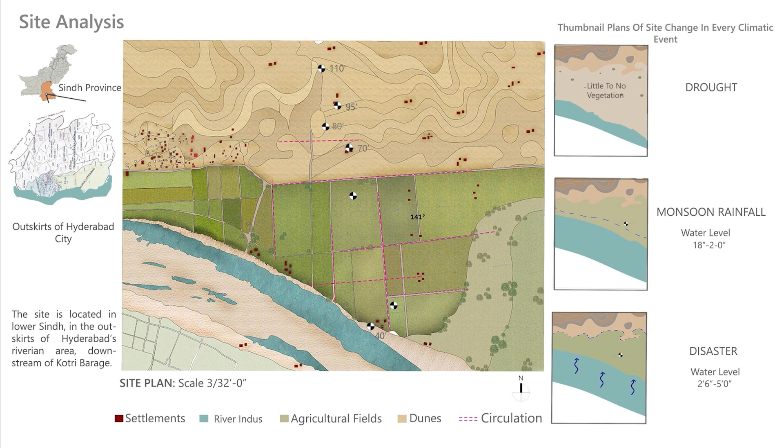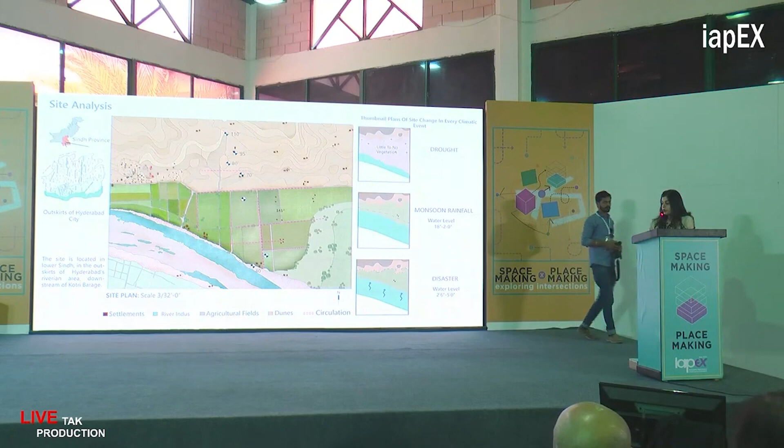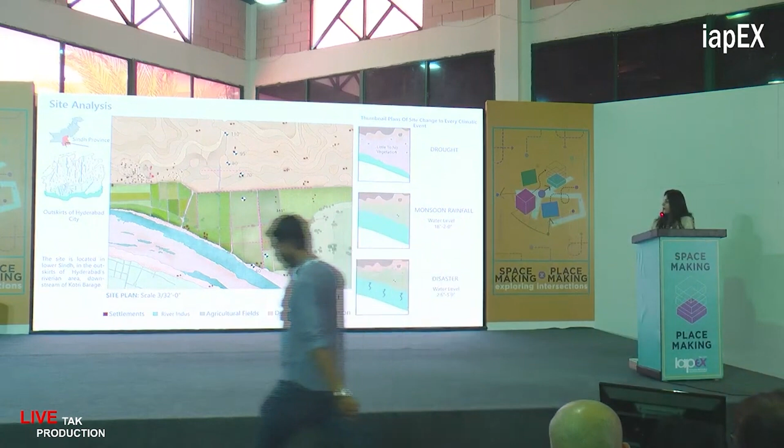The thumbnail plans to the right show that the site is in constant flux because of the flow of the water and the climatic discrepancies that keep happening. The site keeps changing.

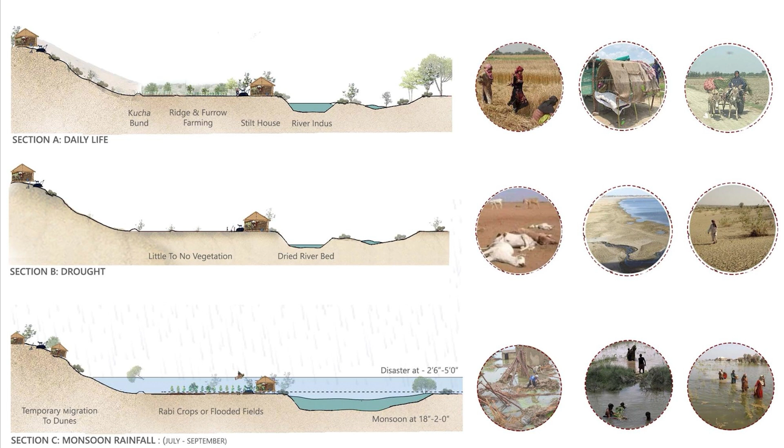The site section, on the first section, shows the site in daily life. During daily life, ridge and furrow farming practices are happening. The communities live on stilt homes made out of bamboo. Their mode of travel is on the Kucha bunds that happens on these donkey carts, and most of their daylight working hours are spent working on the fields as farmers.

The second section shows the site during a drought or a heat wave where there is little to no vegetation, the riverbed has dried, and cattle health is disrupted. The land is also unfit for cultivation.

Section C shows the site during monsoon rainfall or even in the advent of a disaster. During the summer monsoon months, July to September, the rabi crops can be flooded in an extreme condition, and the communities have a temporary migration towards the dunes. The images to the right show how the landscape changes during each weather pattern.

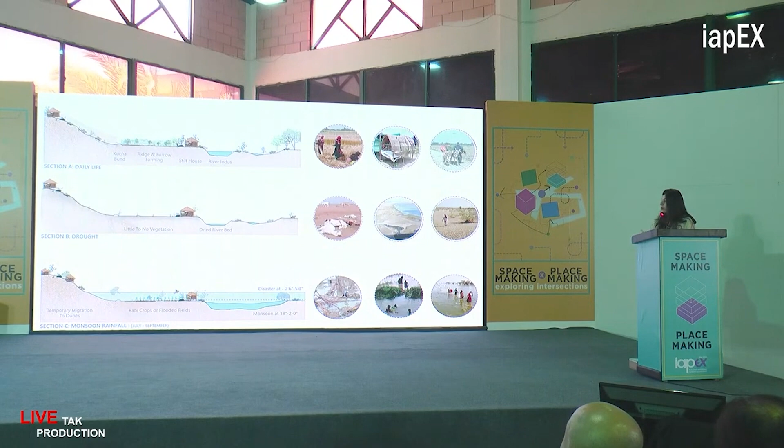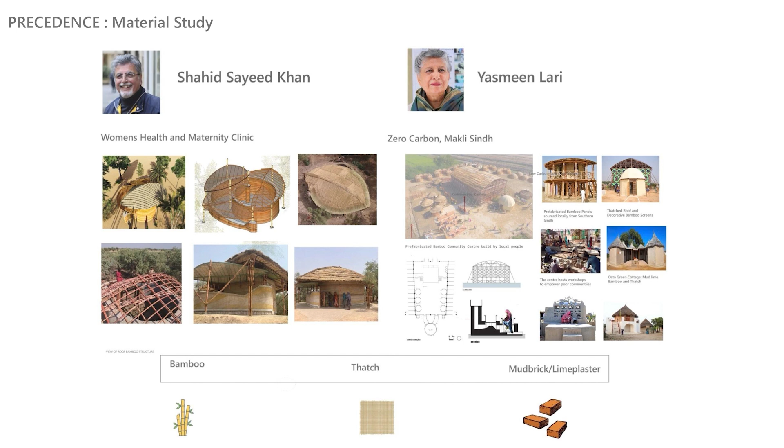For the building and construction of this project, I looked at the work of architect Shahid Sayeed Khan and Yasmeen Lari because they have proposed long-term solutions working with these communities. It was concluded that bamboo, thatch, and mud brick coated with lime plaster was the best material for use.

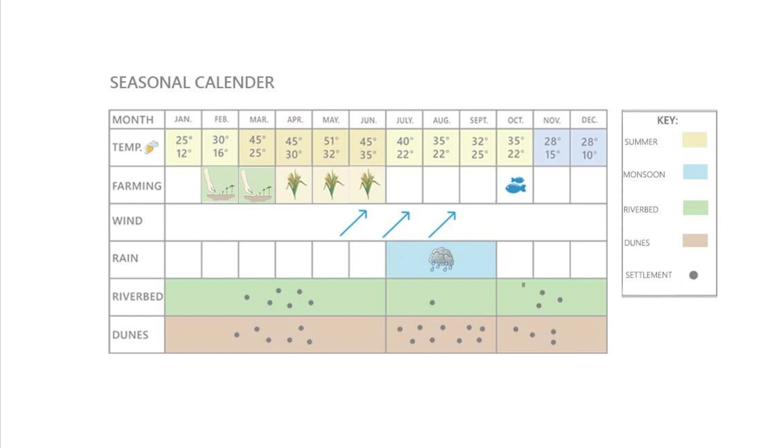To understand the users of my site and their makeshift way of life, I made a seasonal calendar. The first row records the temperature, the second records the farming, so the sowing and the harvesting period, the wind direction at my site, rainfall that happens during July and September, and then the last two rows are the population densities on the riverbed and the dunes.

It is concluded that the communities have a nomadic or makeshift way of life where they keep moving from place to place to find the best environment for their crop and their livestock. The last two rows depict that the dunes are always populated all year round because they are higher elevated ground. The riverbed is also populated because they work near the fields and they need to collect water, but during the monsoon months, the riverbed is not very populated.

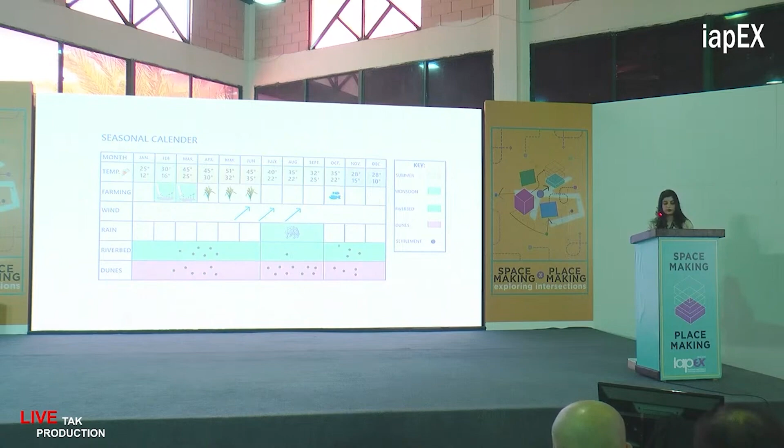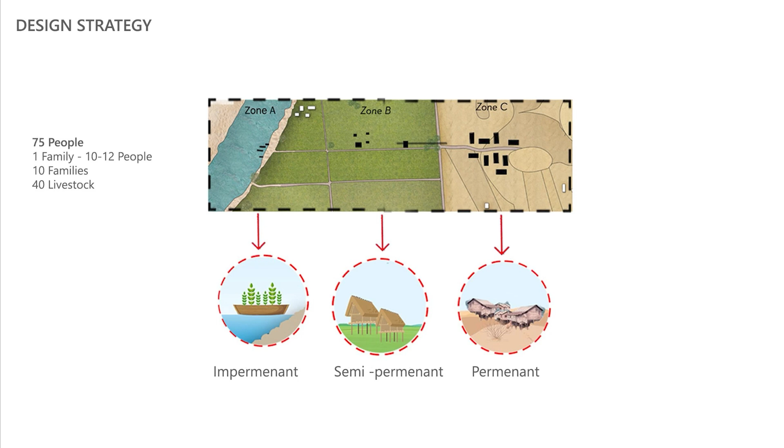After observing these movement patterns and the nomadic lifestyle of my users, the design strategy was that I scattered my architectural masses on three zones, Zone A, B, and C. Zone A has all the impermanent architecture, Zone B is semi-permanent, and Zone C is permanent. These all abide to the laws of nature so as not to disrupt the natural environment.

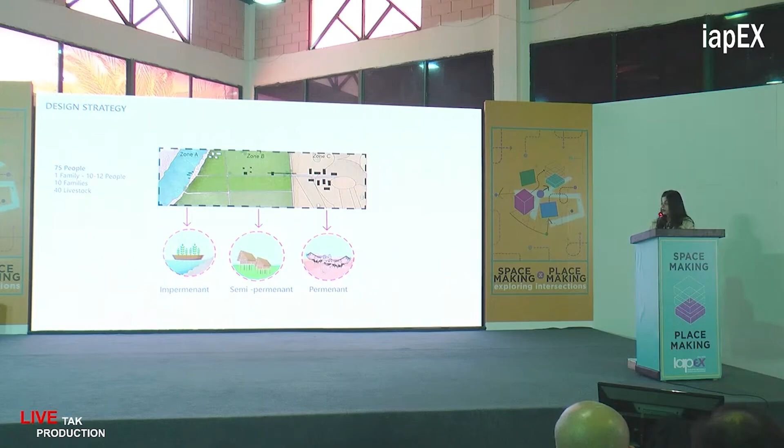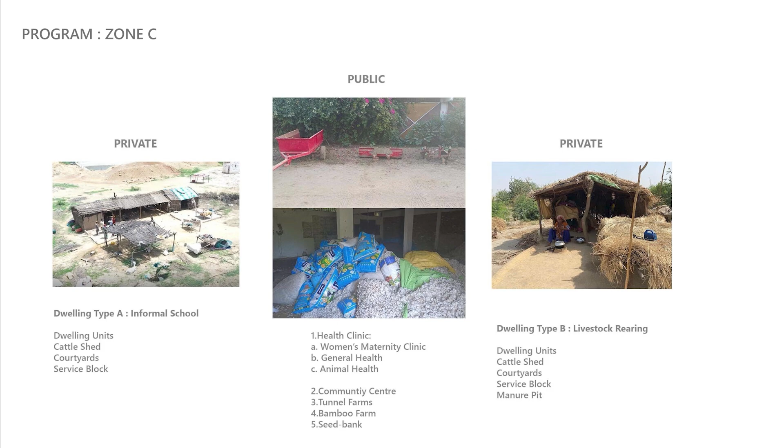The program for Zone A was floating farms, as I earlier mentioned. Zone B was a multi-purpose dwelling on field. Zone C had a public and private wing with all commercial activities to create a self-sustaining village.

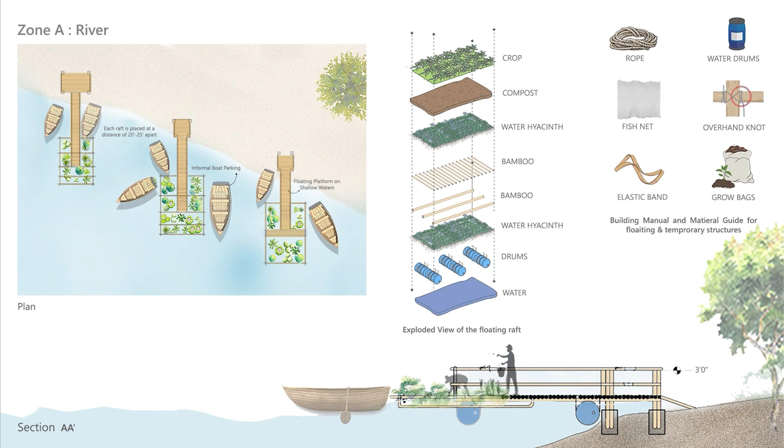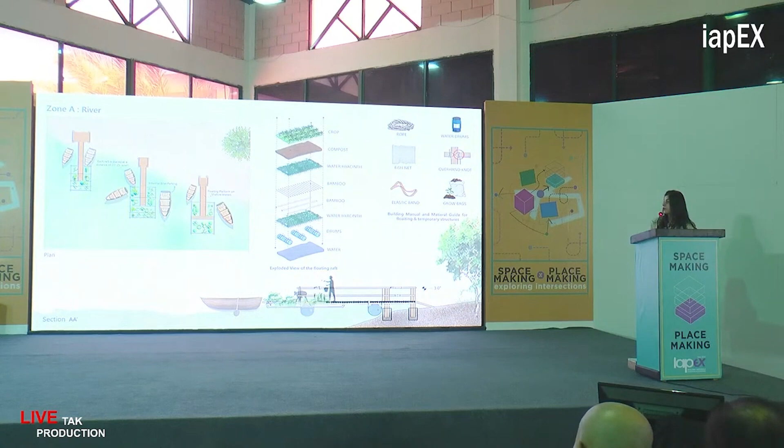Zone A has the floating rafts that I had spoken about in my earlier precedent. This is a nature-based solution and a form of hydroponics that uses bamboo tied to water drums that float on water, and the floating bed is prepared through water hyacinth and cow dung. As you can see on the material palette to the right, all these materials are cheap, they don't disrupt the environment, they're sustainable, and they can be easily dismantled, and they float as well. The plan also shows that these rafts can be used for informal boat parking.

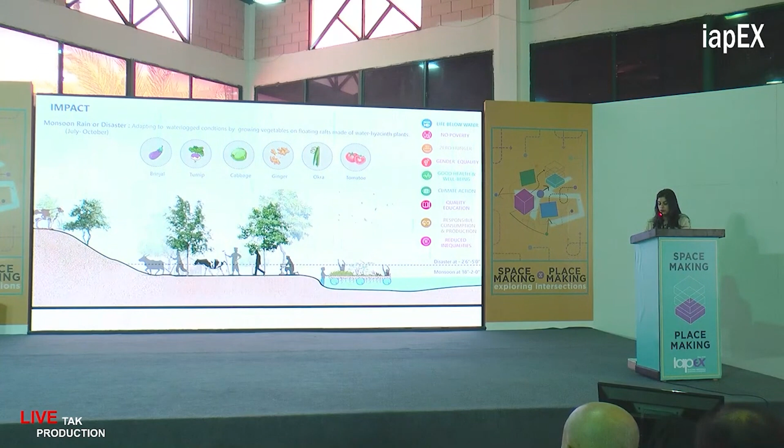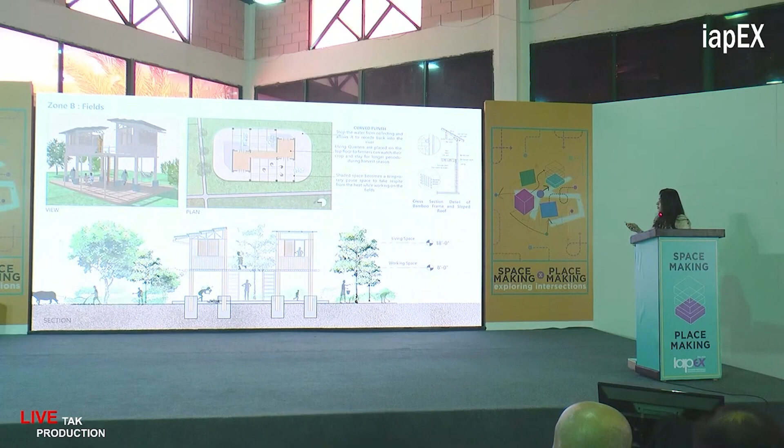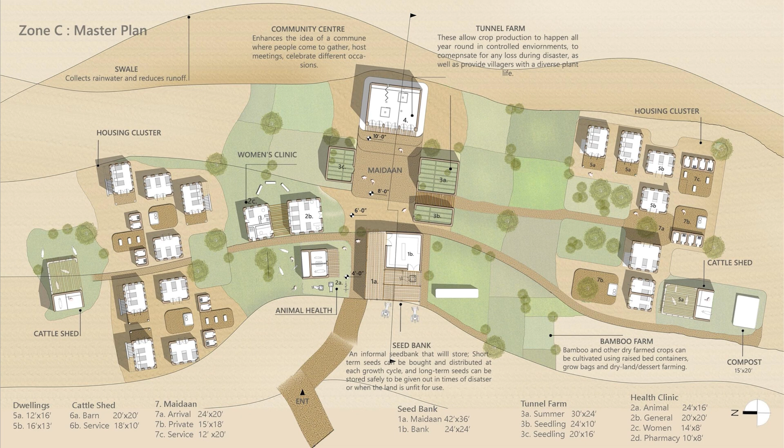The seed bank is an informal storage space where long-term and short-term seeds can be sold during each growth cycle. So in case there's a disaster or a climate discrepancy, the seed bank stores essential seeds so that farmers can sustain themselves and also feed their livestock.

The Maidaan is where all informal activities happen. The topmost space is the community center, where people come to gather. They host meetings and celebrate different occasions.

Tunnel farming has also been introduced, where you can artificially grow different kinds of crops, and you can even sell the produce to nearby markets. This helps the communities become self-sustaining and have an additional income.

To the right and left are two housing or dwelling clusters. Each of them has a cattle shed and a series of small courtyards around them, and also these green areas, which are grazing grounds for cattle. The topmost areas have a swale, which collects rainwater and reduces the runoff, so the communities can actually go to the topmost dune and collect the rainwater so it does not go to waste.

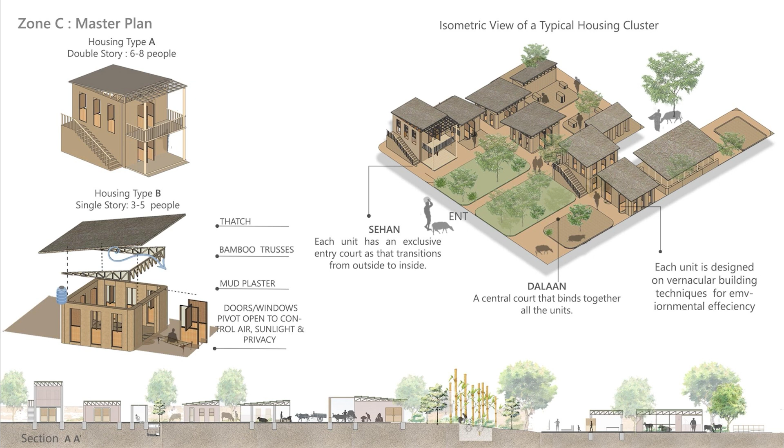The isometric view of a typical housing cluster shows a number of dwellings arranged around these sehans and these dalaans. Each unit has an exclusive entry court, so you can sit inside and outside. The courts make sure that the microclimate is maintained, as well as informal activities can happen.

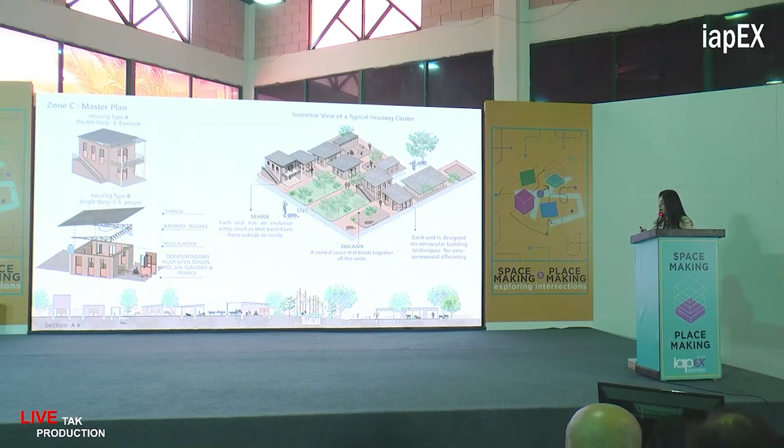The softscape and the green area has vegetation that filters off dust and heat exposure. Each housing unit is built along vernacular building techniques, where you have sloping roofs layered with thatch, with bamboo trusses and mud plaster for passive cooling. The doors and windows pivot open so you can control the air, sunlight, and privacy. There are these two types of dwellings for big families and small families.

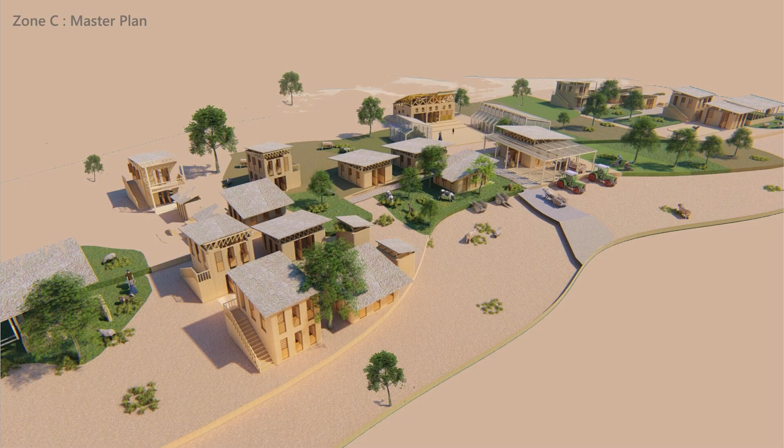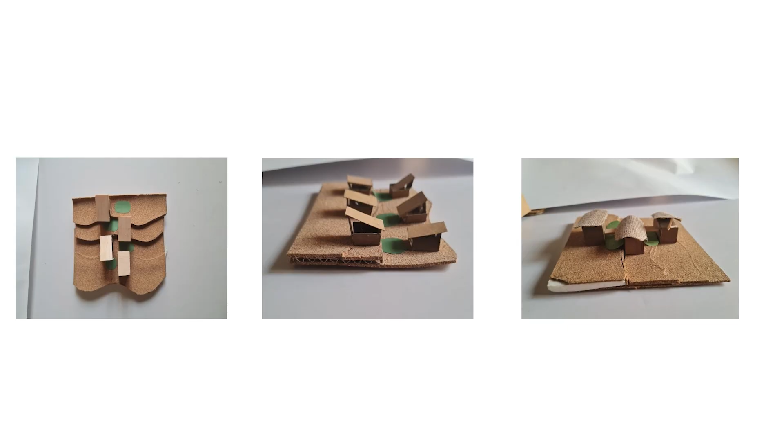This is how the terrain has been strategically controlled for privacy, harvesting wind, and to create the swales. This is an image of what the site looks like, and more. These are just some maquettes that I made initially when I was studying each cluster typology, trying to look at the terrain, the sloping roofs, and the vegetation or the cattle ground in between them, and how the clusters should be placed.

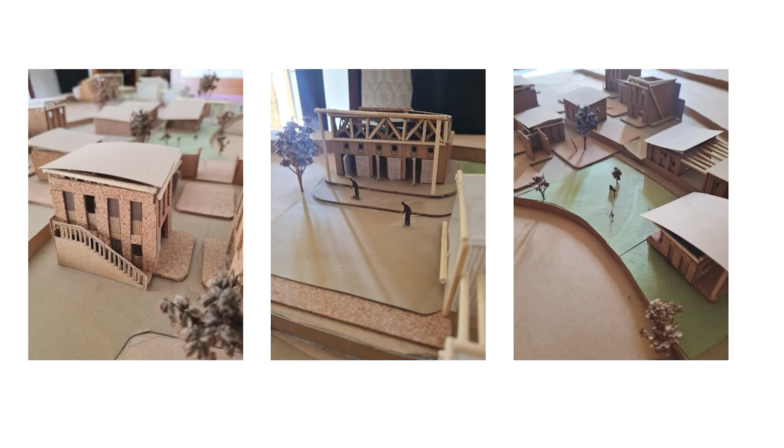These are just some snippets of the final model and how it was looking. Thank you.